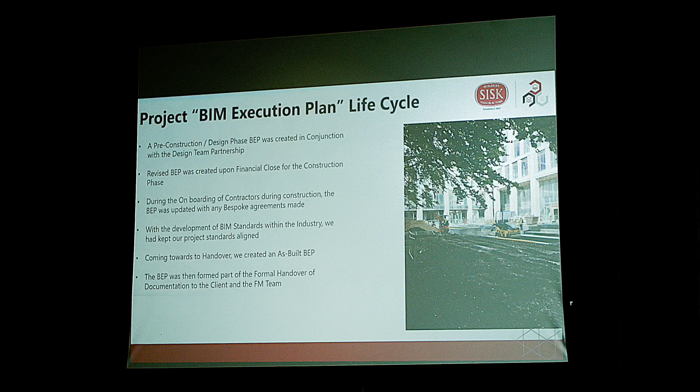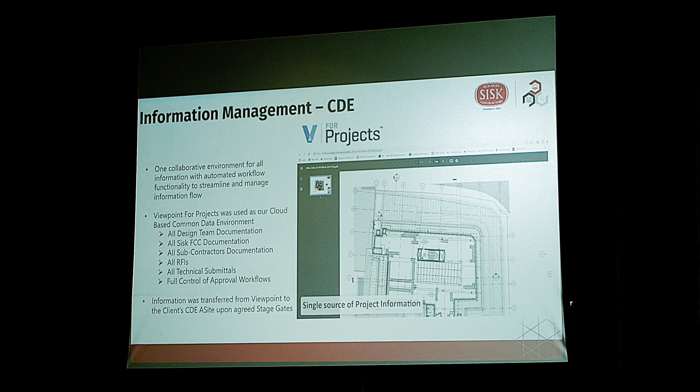So how do we approve information? How do we upload information? Who should the drawings go to before they get approved, before they go out onto site? If we had any RFIs, we'd raise the RFIs through the platform. If we had to do a comparison of different revisions to see any design changes, you can do this all within the one environment.

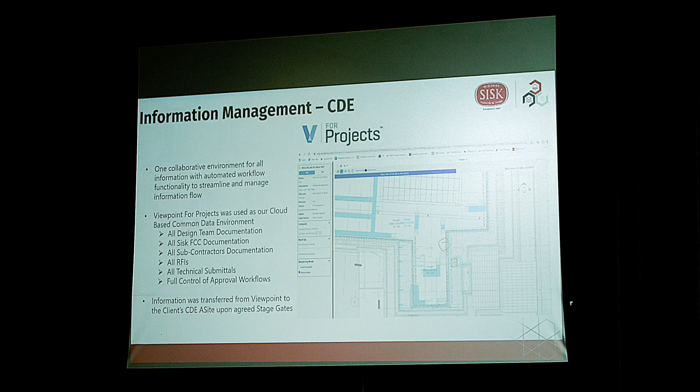So Viewpoint for Projects was the platform we used on Grangegorman, and this is how we actually executed the project. But there's a number of different platforms out there in the industry, and you can see more and more requirements for people with this digital skill set. But we have to make sure they're easy to use and easy to navigate, and that it is the right information at the right time.

As I mentioned, you raise your RFIs, and any information that you want to direct your design team to is all within the one platform. So you don't have duplication, and you have a full audit trail and record of all the information on the project. This is managed by our document control team - that'll be key to managing the information management. That's aligned with ISO 19650, but at the time, Grangegorman would have been PAS 1192.

It's been done digitally. The client didn't call up asking that we use these types of platforms, but these are platforms that we can gain benefits from, and our supply chain can gain benefit from.

So the next slide, I'm going to hand you over to Dillon here. Dillon Johnston would have joined us as a graduate from GMIT, and he's going to run through the digital project delivery approach. So there you go, Dillon.

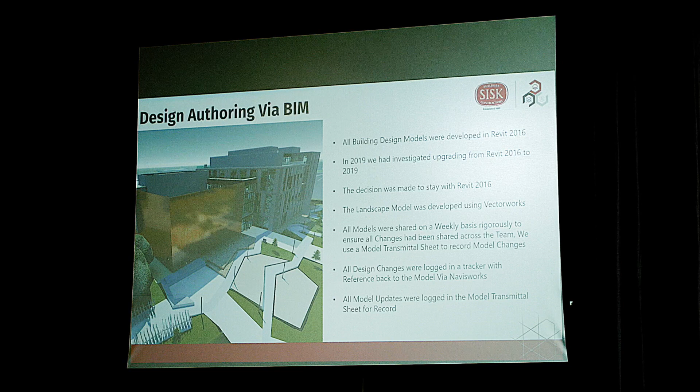Moving on to some of the design reviews we carried out. We carried out quite a lot of design reviews with the client, our design team, even our contractors, even internal design reviews, just to make sure we were able to pick up on any issues so it wouldn't carry on to site. So design reviews like room layouts, equipment layouts, and structural analysis and stuff like that.

Navisworks would have been our main tool for 3D coordination, and any issues we found we would have saved as a viewpoint, and then actually brought on to BIMcollab, which was our cloud-based BIM issue management software.

We also utilized Dynamo for a lot of information production, so all your non-graphical information - we would have exported schedules from Revit and populated them in Excel and imported back in. We were able to streamline our drawing production where we could bulk print everything to PDF and DWG all at the same time.

We would have used visualizations and communication throughout the whole project. We created numerous videos for the client and the surrounding community. It was a very big site in Dublin city centre, and there was a lot of community around. They wanted to see what we're doing, so we did a lot of renders and put posters up around the whole site and engaged with the community around us.

Our main software for all these walkthroughs and renders was Lumion, where we would have edited all these videos in Adobe Premiere Pro. Adobe allowed us to have those advanced editable features inside it, for example, 360 footage and all that. For all the internals, we actually used Enscape, where we would have done 360 renders.

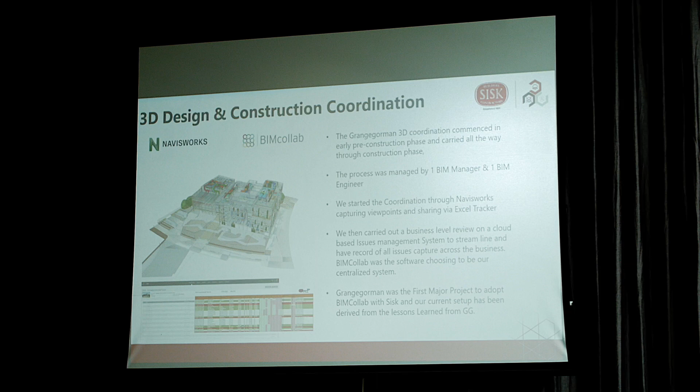For offsite digital fabrication, or DFMA, and MMC, we aimed to offsite fabricate as much as we could on Grangegorman. There's some elements like the facade panels and combined window units on the central quad - it's a very prominent feature on the building.

The atrium stairs of both the central quad and east quad were big, huge, full-flight prefabricated steel stairs, actually shipped to site and lowered from the top down. The likes of your precast stairs and cores - you can see here on the picture we have the performance hall in the east quad. So we had our steel lowered down into 12 different sections and then connected back to the frame.

So in terms of the coordination on this, it was a very heavy task to coordinate with all disciplines. It was a very heavy coordination cycle. But we actually had all of our coordination and all clashes with any of our prefabricated elements clash-free on the building before it went into fabrication.

I suppose just to add to this as well, with MMC and offsite fabrication, it's essential that you have it fully coordinated virtually before it comes to site. Otherwise, you're setting yourself up for failure. So what we were doing was ensuring that it was right in a virtual environment, in the 3D model, making sure that all of our stakeholders had all their elements coordinated with the packages that would be coming off-site.

I think for anyone, and I know MMC is one of the main topics in the industry now, and everyone wants to move towards off-site. But in order to do that, you have to ensure that it's digital first, and that it's fully coordinated in a digital environment. And then even what we were doing is doing 4D scheduling, so what was the sequence of the install of these packages coming to site as well. But as mentioned, it's crucial that you get it right first time in a virtual environment.

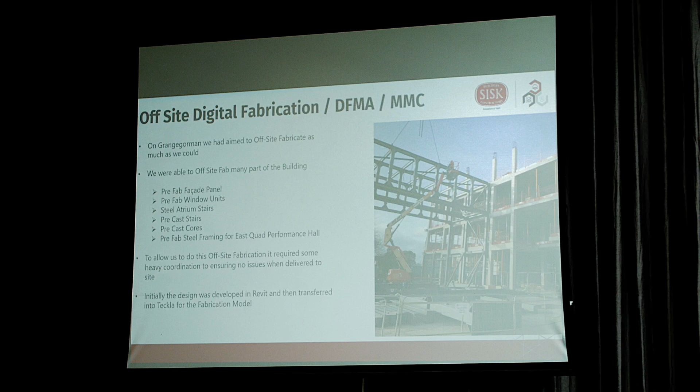So that's a lot of the work that myself and Dillon would have been doing, but we'd have this all documented in the BIM execution plan, and then it'd be up to Dillon and the design management team and the package managers to go out and actually execute this on site. So it's a point just to raise, because it is very important going forward in the industry with MMC. So go on ahead, Dillon.

Our construction record and as-built model. So during the construction phase, it was outlined that we would progressively redline drawings as a method of tracking as-builts.

The redline drawings were then, as you know, they're not going to be done on one big sheet on site. They're going to be done on an A3, and then they actually get brought back into the contractor's office where they would have a master set.

So once that master set was complete on a certain area, we would actually get them to update the model, and we would run a clash detection just to make sure, because we had multiple contractors saying their model was as-built, so we just had to do that kind of last review.

Whatever issues we found there, we actually either used HoloBuilder in a meeting, in our weekly BIM meeting, or if we couldn't decide on who was at fault, we'd actually go out on site and take a few pictures which we could upload back to BIMcollab as well through the phone or the iPad.

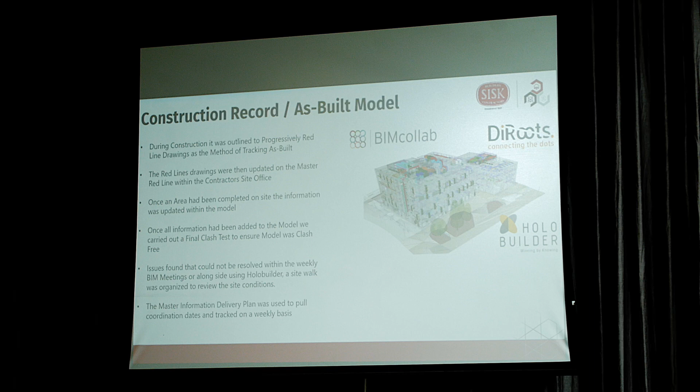So a lot of our dates then for delivery of construction as-built drawings and models were actually taken from the Master Information Delivery Plan, and we were trying to hit our dates based off that as well. So.

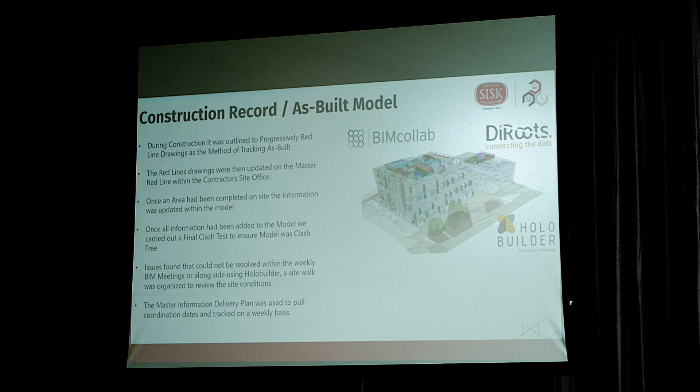Then follow on with HoloBuilder for space tracking, management and record. During COVID-19, a lot of our sites were shut down in Ireland and the UK or across the world. But luckily, Grangegorman was deemed a necessary building to keep going for the 2021 academic year. This presented a lot of challenges for our design team, which were primarily based in the UK, as they weren't able to travel over freely as they wanted to.

So we actually implemented the use of 360 cameras on the site. We had 2 in each site. And then we introduced HoloBuilder as a way of tracking those 360 images, where you can go around with your 360 camera and plant it on one of your plan drawings, and then you have full version control - let's say you could have taken one photo a week for 10 weeks, then you can compare from week 1 to week 10. So this reduced the need for travel to site and for our site supply chain.

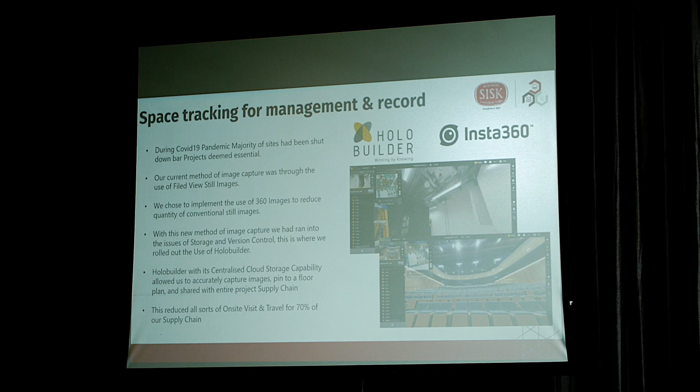Moving on to digital project management and data analytics. Advanced reporting wasn't a key driver on Grangegorman, but with industry development, it's proven data insights have become very useful for better decision making and planning on our projects.

Learning and adoption of gathering, cleaning, and implementing data on a project was carried out in certain aspects on Grangegorman, where for the likes of as-built trackers, we were tracking all of our drawings through the MIDP, and BIM issue tracking through BIMcollab. We actually did a lot of B-card tracking, so we created a master B-card tracker, and we also did some design trackers as well, which we brought into Power BI to develop some really useful insights, and that proved to be very, very useful back in 2019 onwards.

This increased the data insights, and we were able to plan and make better decisions. Even just on data analytics, it is becoming more of an essential role now on site, whereas previously we wouldn't have had the skill set around Power BI or people that were actually data analysts who had studied that.

But now you can see, with the amount of information we're gathering on the common data environment, on our digital field tools, in our BIM models, we can now start mining that information and getting good predictions as to how we're actually doing on performance, how our design is coming along, how our subcontractors are performing. So it's now a new skill set that we're having to develop.

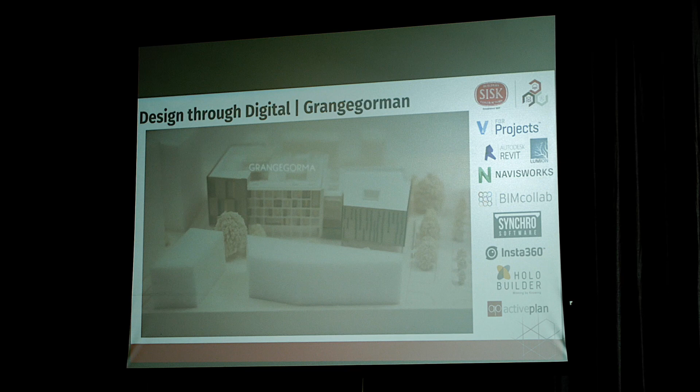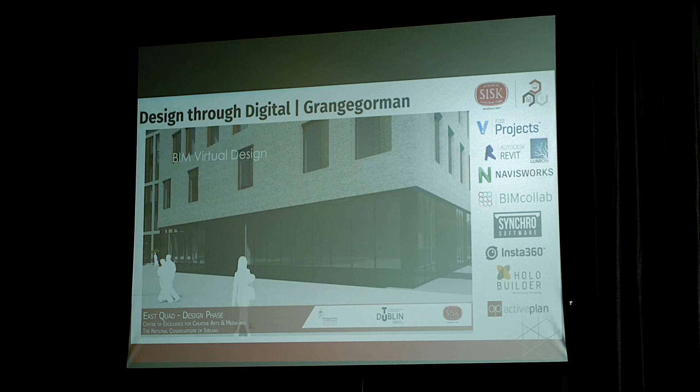So you can see as we go through Grangegorman, both the East and Central Quad, how we were using it with our design teams, and then how we were bringing it into construction, and what software and platforms we were using. As mentioned at the bid stage, it was a competitive bid where we had to demonstrate and propose the designs.

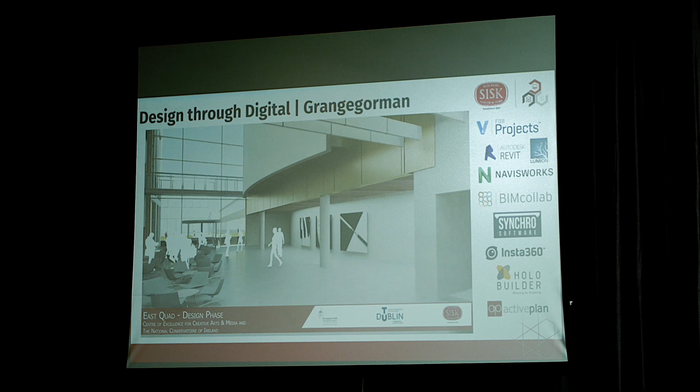We had to work with design teams based in the UK, but we had to do this in a collaborative environment. So we were using Viewpoint, we were using Navisworks, and then we'd be rendering in platforms such as 3ds Max and Lumion to produce these types of renders, which would be part of the proposals as part of the contract award and bid stage.

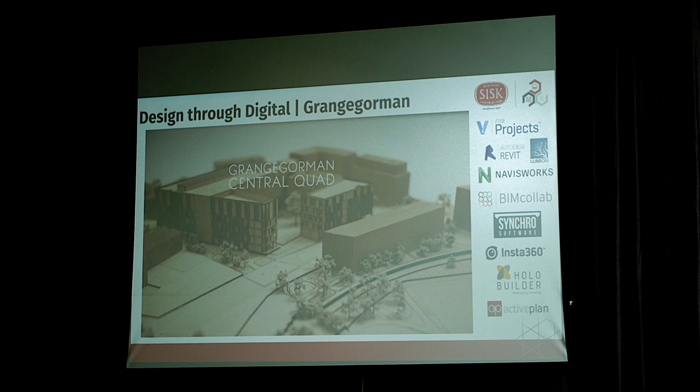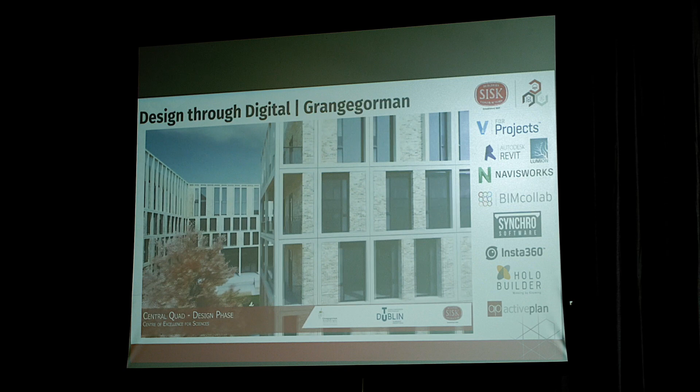So what I would say for anyone that hasn't been out to Grangegorman is, if you get a chance to go out and visit the campus, they are two impressive buildings when they're being handed over, and you can see the design thought that was put into it and how they were all coordinated and how they work together.

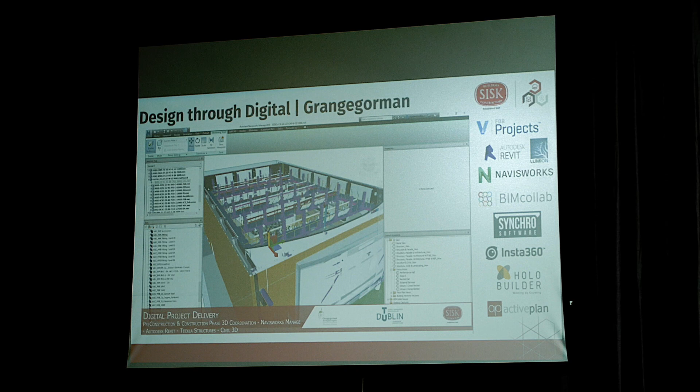So you can see here, this is just an example of doing some design reviews and coordination through Navisworks. I'm navigating through the model, looking at the steel frame here. Now I'm going on to the civils, which we had an impressive as-built civil model from the Grangegorman Development Agency, which we integrated very well with our own systems. And now you can see I'm just carrying out some clash detection here.

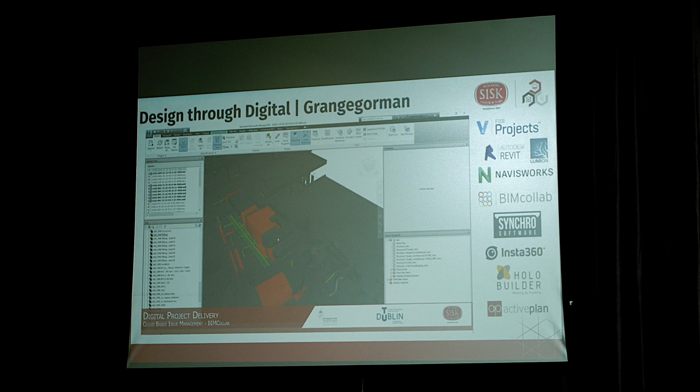Then I'll bring it into BIMcollab. I'm going to comment on some issues, and once I sync it back, it'll sync back straight to the cloud and send out notifications to the team as well. And with this, we actually brought this into Power BI through the KPIs I worked with BIMcollab to create, where we can gain better insights onto the project and report back to our supply chain.

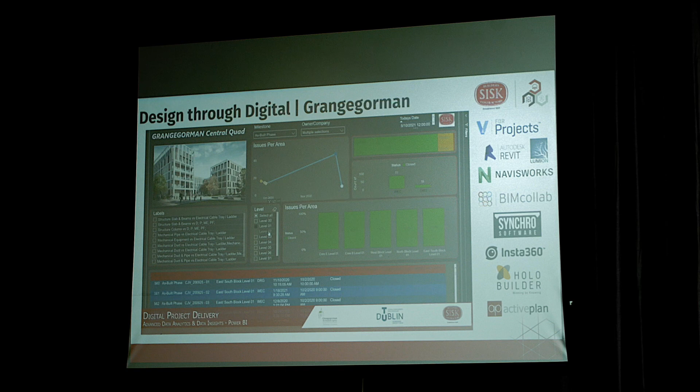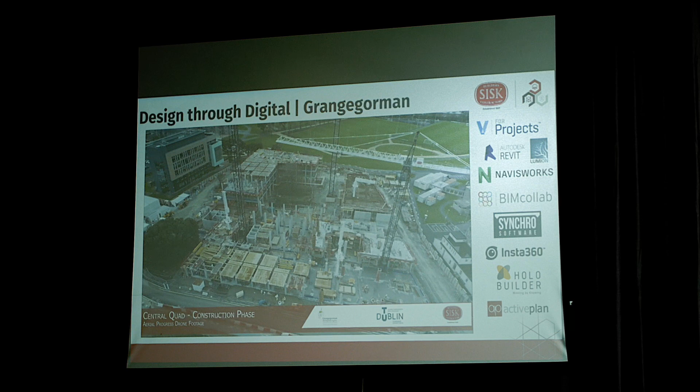And look, you can see even a simple process such as drone footage. If you have agreed monthly drone footage to track progress on site, this is now standard across all of our projects - you agree the flight path and agree with the authorities when doing those flights. But it's great then to have this as a record to go back over at the end of a project. You can see the progress right throughout the construction.

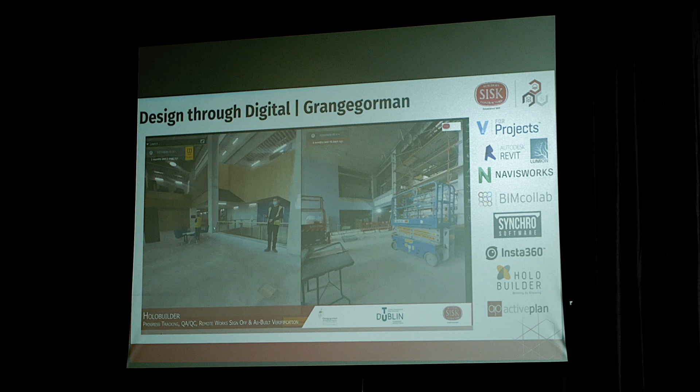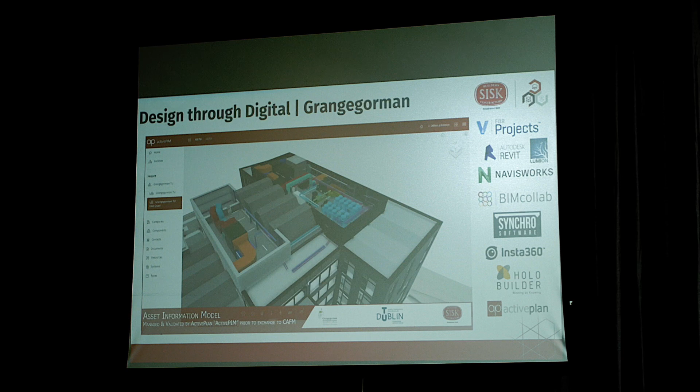Grangegorman would have been one of the first projects we brought this type of policy into the company, but now we have this across all of our projects. And you can see here we're on HoloBuilder and Active Plan, which would be the actual handover platform we had for the asset information. So the client now has access to ActivePlan, which we're using for the asset information gathered during construction, and we have a full digital safety file within ActivePlan as well.

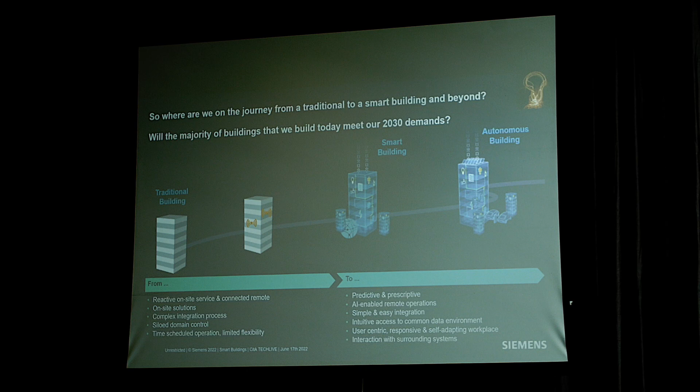So there's a lot of trends and needs we're responding to at the moment, adapting to meet the challenges. Key to this is our new workplace experience - higher end user expectations and big changes with flexible working. We need the data, we need to understand how buildings are operating. We're all used to better interaction and user experience on our mobile devices, and we've a lot to learn from that in the building industry - making it easier and simpler for those that have to use these systems, so they can easily resolve issues and have a positive experience with the software. I think it's improving all the time.

We've got higher energy costs, they've gone pretty crazy, so that's a big focus. And then sustainability - decarbonisation targets, ESG - Siemens are certainly trying to lead the way in this respect.

Digitalisation, and a lot of talk about it obviously, really getting value from the data. That's one of the key things I've seen over the last couple of days - this is what we're actually doing, it's no longer hard work to get it. We are deriving value from the data, and we can keep making that easier and better, more productivity, more efficient systems and less waste. But without cybersecurity in place, obviously, to adhere to the standards, everybody needs trust and faith in the systems we're using.

So Siemens' approach to smart buildings - there's a lot of text on this slide, but it's really a user-centric approach, building on that user experience, looking at those personas and developing the right solutions to meet those end user needs, whether it's the operator or whatever the purpose of those using the building. We have to have flexibility built into our systems now - we've seen how changes can happen very unexpectedly, and we need to be able to respond to that and to our broader ecosystem as an interactive building.

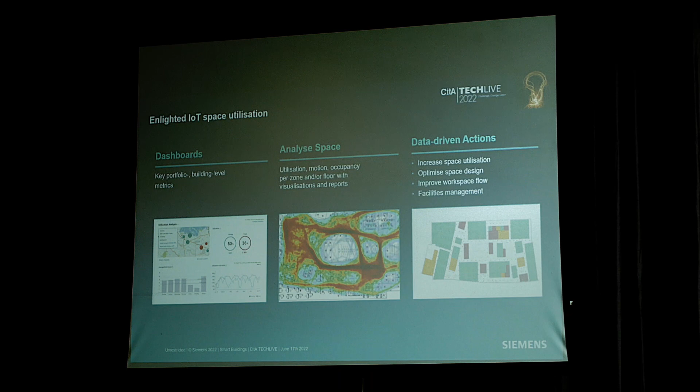Okay, a couple of use cases. I mentioned before, we have plenty going on in Ireland with Enlighted, quite a large install in a very large pharmaceutical plant that's a vaccine maker in the west of Dublin. At the moment it's ongoing, and it's great to see, saving an unbelievable amount of energy and really future-proofing buildings. Quite a lot of installs in our global high-tech sector too.

I think one of the biggest software companies in the world, based in Dublin, has installed it, and Scott Group have been over with that company doing installations in Africa and in Eastern Europe because of the great installation work that has gone on, and how satisfied that customer was with their work.

This one is a very long-term energy performance contract and collaborative partnership. It's taken a while to put in place, but it's the University of Birmingham - quite an ambitious statement that they released in a joint press release to be the smartest university campus in the world. In the first phase of the project, there's 23,000 Enlighted sensors being installed, but this is just the first stage, just kicking it off, getting an understanding of how the buildings are actually being used, and potentially offsetting the need for additional buildings, additional concrete, and the overall impact on carbon production. So campus-wide energy upgrades, energy and asset installations, and really working through phase by phase to bring them to a net zero position collaboratively. Just an example of a reference case that's ongoing.

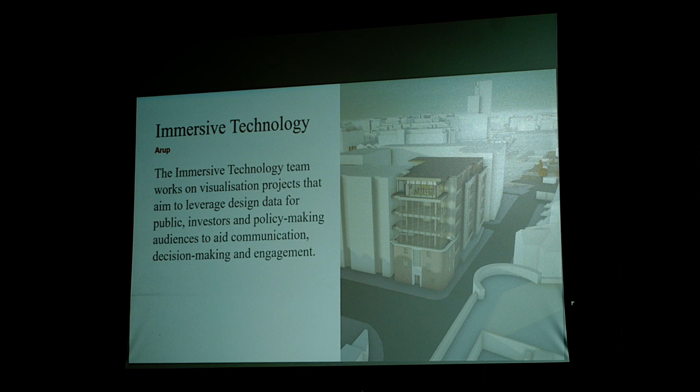I'll run through the four pillars. These are our building blocks that we use when we approach a project, and we take a fluid approach, taking bits and pieces from each of these: interactive platforms, powerful storytelling, objective decision making, and human-centered experiences.

I'll start with interactive platforms. This is choosing which platform you want to base your project in - is it going to be VR or AR, and so on.

First of all is the Arup Virtual Engage. This is for public consultation.

We actually did this during COVID, so when all the community centres were closed down, we brought this into a digital, online format, so the public could access the reports and see everything that way.

Then we have the Matterport scan, which I'm sure some of you are familiar with. This is a 3D camera, or a 360 camera with LiDAR scanning as well.

You take this into a space or facility and move the camera around into various locations, and it builds a full 3D model of itself.

For this example, we did it for the NCH, where it was a confined tunnel space with limited access. We put the camera in, built the model, and then the engineers could access the model at any point they needed to see it.

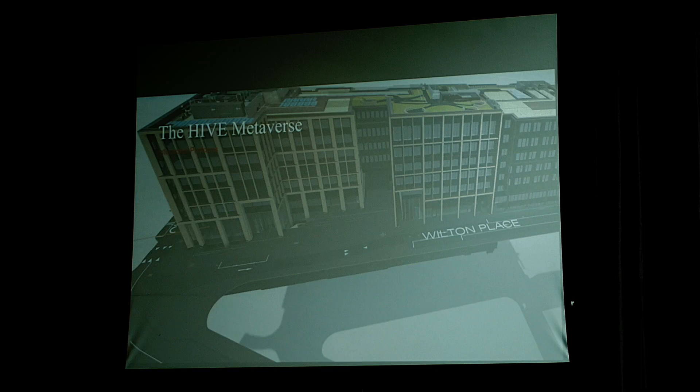And we can also link in from our Cork office, we've got a Hive there, as well as with our team in London. You can have meetings anywhere, and it just becomes so much easier and accessible.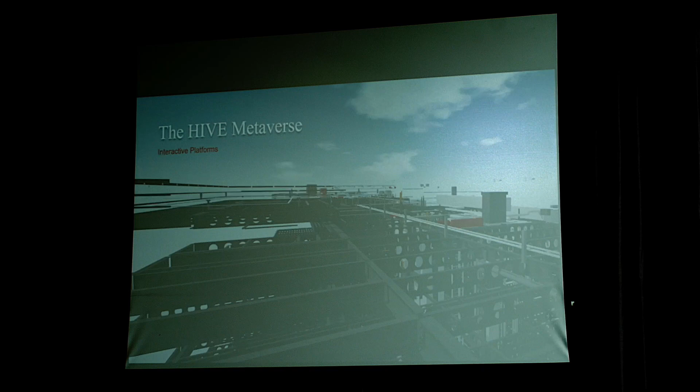And then we also have the Experience Lab, which is in London. I'll just let this video play and then talk after.

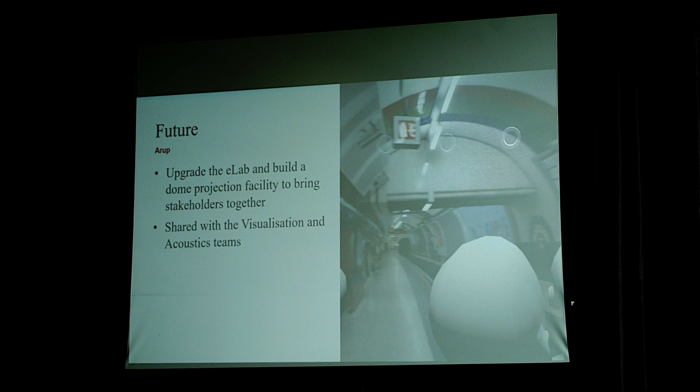So again, I touched on this earlier, but the whole idea is to try and move beyond VR and have a more natural experience when reviewing. Their future concept is to design a dome projection room that you'd be inside, and everyone can talk together and have meetings. They were talking about having a motion platform underneath, so if you're on, say, a train, it would move. They're talking about wind and smell-o-vision and so on. It's very far advanced, but it's interesting to see these ideas come to life.

And then there's powerful storytelling. This is used when you're approaching a project, at the very beginning, trying to understand what the project is. So this is necessarily using your artistic license to sell the concept, at the very early stages, for stakeholder engagement as well.

So this first example is an offshore wind master plan. We're working with the engineers who were designing the different layouts. We brought it into Unreal Game Engine with a 3D model, and you can navigate around and see the model from that perspective. You can also go to different locations around the site and see the scale of how big the wind turbines will be. And then we also had one going out into sea as well and seeing what that looked like.

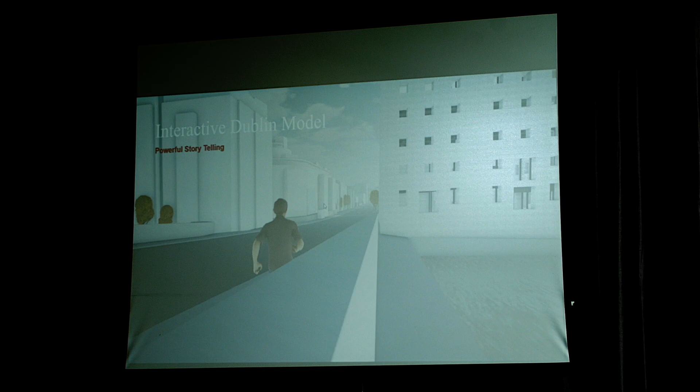And then we also have the interactive Dublin model. This was built to showcase the projects we're currently doing inside inner city Dublin, and we were showing that to Arup globally. It was more to build a timeline of projects, so you can see what it looks like today versus what it looked like in 2030, and get a feel for the change in the city.

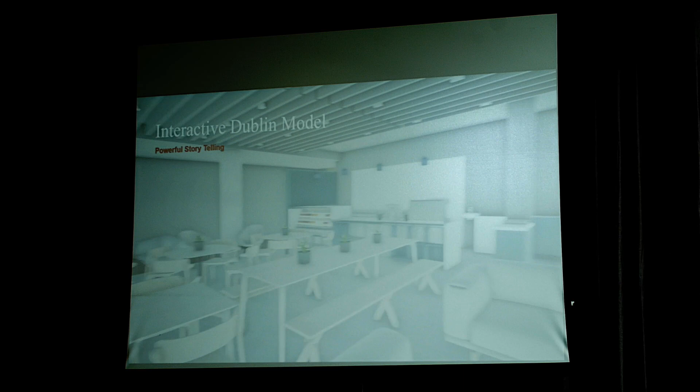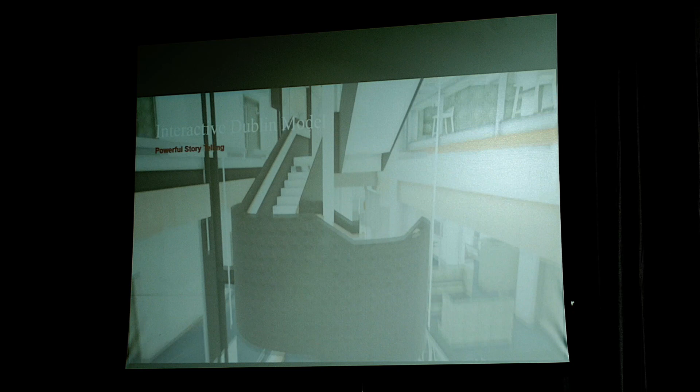So we put in the new Dublin - our Dublin office got renovated, so we put the new model there. We're also looking at Trinity College, where we put the new science building in, and you can navigate around and go inside the buildings as well. And then we brought Bus Connects too, so you can go into ground view and walk around the city and see it from that perspective as well.

And then similarly to the wind turbine project, we brought Morrison's Island in. This is based in Cork, a flood relief scheme. They're planning to build a wall along the River Lee, and as part of that, they decided to revamp the promenade area and make it an area shared between pedestrians, cyclists, and cars.

And we also did some photogrammetry - we flew a drone along the area, built the model inside 3D software, and it also built the 3D model of the new promenade, merging all those together inside Unreal Game Engine with the Cesium plugin, used to get into the real world and see what that looks like.

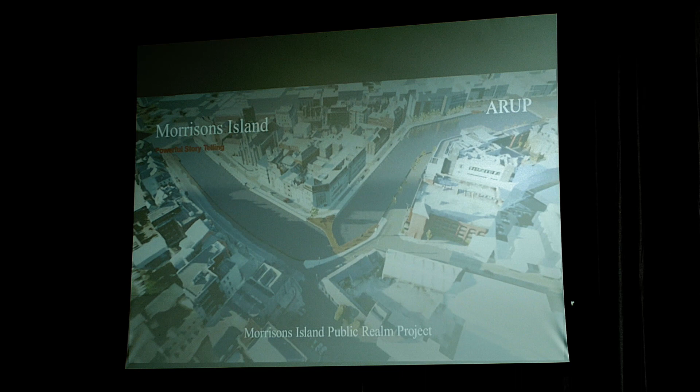We also worked on a project envisioned for Cork in the year 2101. Engineers come up with ideas of how the city might change to make it more environmentally friendly. We got the designs from the engineers and built a 3D model of the city, and I did some renders for the report. We won as well, which was fantastic.

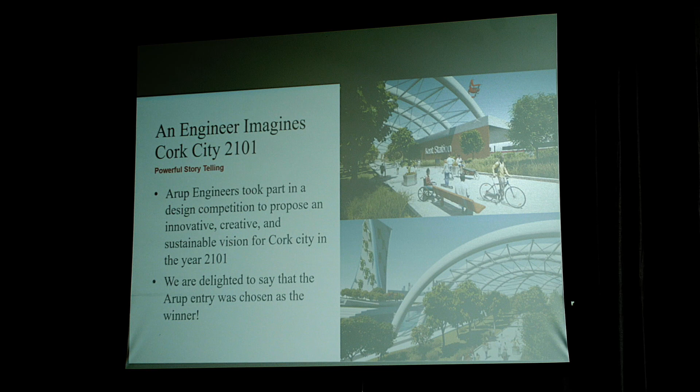Next we have objective decision making, which is quite the opposite of what I just spoke about. Everything needs to be 100% accurate, as this is for public consultation.

The first example is a motorway bus corridor. We flew a drone across the current motorway and got the 3D model from that. Then we built our own 3D model of the new bus corridor route and merged it on top, so you can quickly see what the route will look like with animated vehicles. There were also different variations they wanted, so we could quickly switch between them, like changing where the bus route would be, maybe in the center of the motorway.

The next one is similar, for a railway project. We flew a helicopter across the route, and it was geotagged. We brought that into the 3D model software, built the whole railway with the trees, and then geotagged the rendered camera so it would run across the railway at the same speed as the helicopter, merging both in post-production.

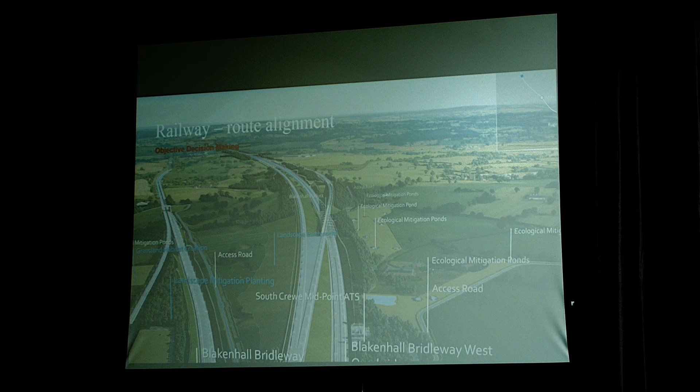We added in all the changes that will be affected. This is for public consultation as well, showing where the railway will be, the new balancing ponds, earthworks, and the new trees layout, so you can quickly make decisions on what that looks like.

Next is some CGI images. These are our standard 2D renders, great for reports and public consultation, showing new layouts for bus routes, cycle lanes, town planning, and pedestrianisation.

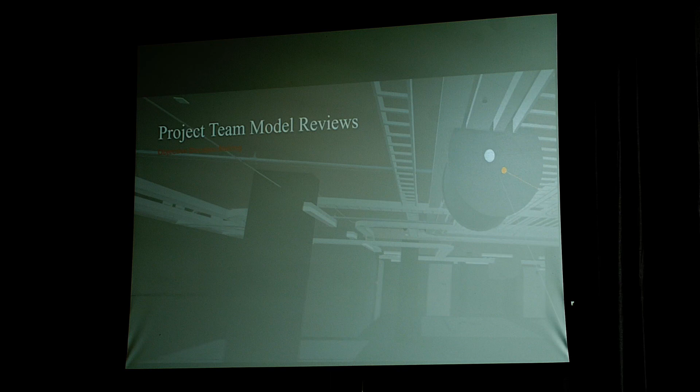We also do this inside VR for team project reviews. We can go inside the metaverse together to check dimensions and issues in your BIM model, tagging all the clash detections. At the end of the session, you can download a PDF, give it to the engineer, they update the models, and the process repeats, saving a lot of time and catching issues very early on.

Then there's human-centered experiences, looking at utilizing extended realities and user experience design when thinking about real-time engines. I'll go through some of these examples.

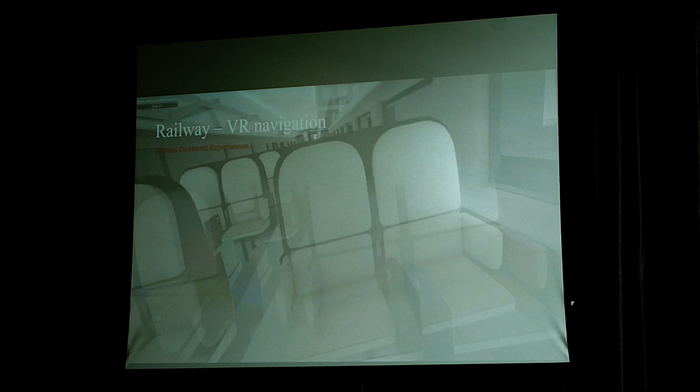For a railway project, we did VR navigation. When inside VR you're obviously blindfolded, so in the physical world we had seats laid out. In VR you have a little tablet showing a green line so you can walk to your seat without tripping over anything, sit down, and take a ride on the train. This makes the user feel comfortable and engaged throughout, without getting caught up on the technology or getting lost, so you get the best out of the design data.

We also have the cycle simulation, done for a new cycle lane in Cardiff. We worked with hardware and software together, so you could jump on a bike inside the public consultation, have a cycle, and once you start pedaling it triggers the VR, so you start to move inside VR and ride a bike.

And then we also have the sound demonstrations. This was for an airport, and for this project there was a lot of detail that needed to be put into it, and a lot of data as well. So we had to figure out what the altitude of the plane would be, what type of plane it would be, how far away it is, and also what location you would be in - would it be urban, rural, or something in between.

So this was for public consultation again, and it could have been anyone using it, so the UI had to be really focused on getting the best out of the design data. We worked with our design team over in London to produce this, so you can quickly select the type of plane and where you're going to go with that.

Just to finish up, as you can see there's huge potential for gain and efficiencies when you utilize immersive technology in your projects. I really hope you gain some insights into what we do here at Arup and what we're working on. We also have a stand over there with VR, so come say hello, and if you have any questions, we're happy to answer them. So yeah, thanks.

Thanks, Michael. If any of my TU Dublin colleagues are listening, we should have one of these in our university. Actually, I thought there was going to be one put into Grangegorman - an immersive experience for our students.

But when we're listening back to those three presenters, what has that got to do with procurement? Well, it's got everything to do with procurement, because let's remind ourselves, procurement is any activity necessary to deliver a business requirement in a supply chain digitally. So what's digital doing? It's reducing costs, making us more efficient, and getting rid of repeatable tasks. So it's not just about the construction contract, it's the need for early contractor involvement and the need for offsite construction.

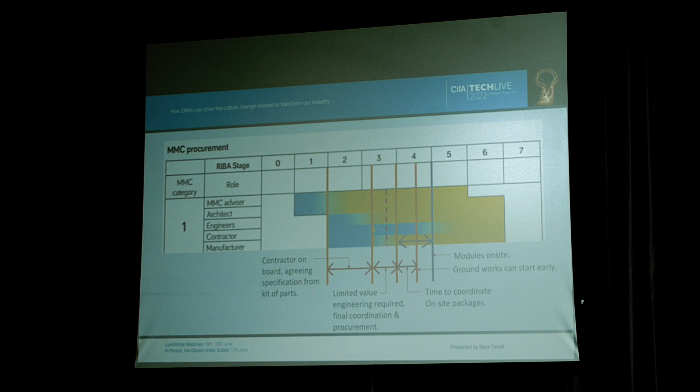However, let's not ignore the big elephant in the room. What about all of this risk up front?

So this is where an MMC advisor, and I don't know how many of these you have over here, but it's a role that has dramatically increased in the UK over the past couple of years. And these guys are looking at scenario modelling around this front end to reduce risk.

You will be looking at altered cash flows if you're entering within a category 1 or 2 type delivery. And the MMC advisor will be looking at a whole life approach of costing. And we talk about skills. So this is sort of an evolution of how a QS might develop their way of thinking for offsite. Skills around whole life costing are key and limited at the moment.

So they will be using value indexes to look at savings in time, defects, labour costs, prelims, etc., which should essentially balance that upfront spending. But you're also looking at a value exchange there for project certainty, so you're not going to get overruns, really, with the majority of offsite if it's done well.

And also the value drivers that you're gaining from your brief, which is why you should be using offsite in the first instance. As I said earlier, there's a lot of work up front, and even though that's the key aspect of DFMA process or optimized process, it does need to be controlled.

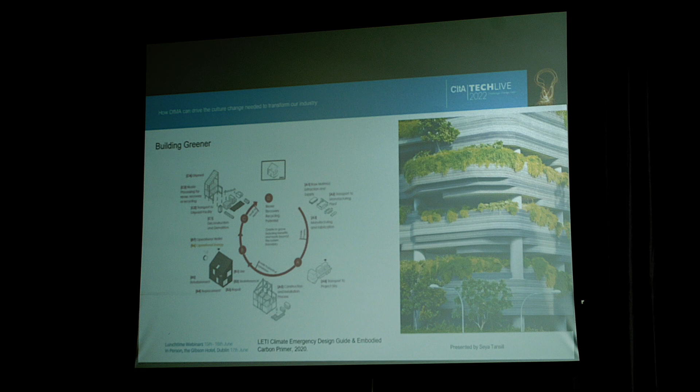We will see. And last but not least, offsite for building safety. Gone are the days we can say we've done it before - Grenfell has put a stopper to that, and it's changed the building safety landscape for good. What is coming out of that in the UK is a huge digital transformation.

We have the Building Safety Bill coming in, and that will be mandating the golden thread. There's two aspects to that. It will drive change in information management in terms of creating traceable digital records of all the building elements - assemblies, sub-assemblies, assets, components. It will make it much easier through platforms to do that. And then the information management process is to ensure an accurate measure of the building elements, kept up to date through the whole life of the building.

So digital upskill is going to be critical, back to the skills gap, in maintaining traceability and quality of this golden thread, and really collection of data to hold accountability.

Sadly, but it's needed, the Construction Innovation Hub are releasing in September a standard quality control process that they are deeming as CPQP - always get those acronyms wrong. This controls the product's design, material substitutions, commissioning, checking, and this is developed actually from the automotive industry, but primed for the construction industry.